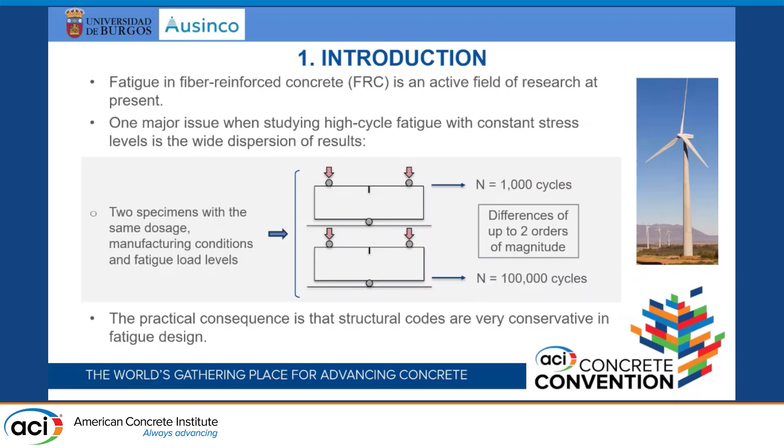Our research has been focused on flexural fatigue and a particular result we obtained, which is the fatigue creep curves, relating the number of cycles versus the maximum CMOD. We are talking about flexural fatigue in notched specimens. This curve correlates the maximum CMOD in each cycle against the number of cycles.

With these curves, we want to achieve two main goals: explore the damage mechanisms that appear in fiber-reinforced concrete and how they evolve, and look for damage parameters in these curves that can let us predict the fatigue life of the specimens, thus reducing the scatter when predicting fatigue life.

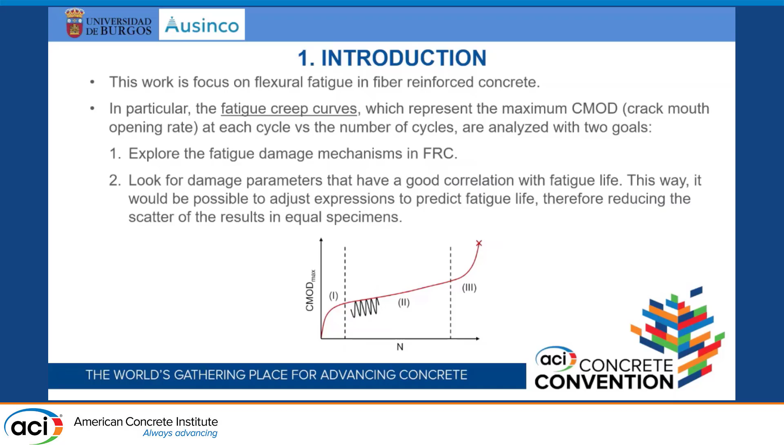So we manufactured 3 series of FRC, all with the same dosage except for the amount of fibers—this is the same for all series A1, A2, and A3. The only component that changes is the amount of fibers, from 0.3% in volume to 1%. We cast prismatic specimens of 75 by 75 by 300 millimeters with a notch of 1/6 of the depth, and cured them for 1 year in a climatic chamber.

Here you have one specimen already broken. Sorry for that.

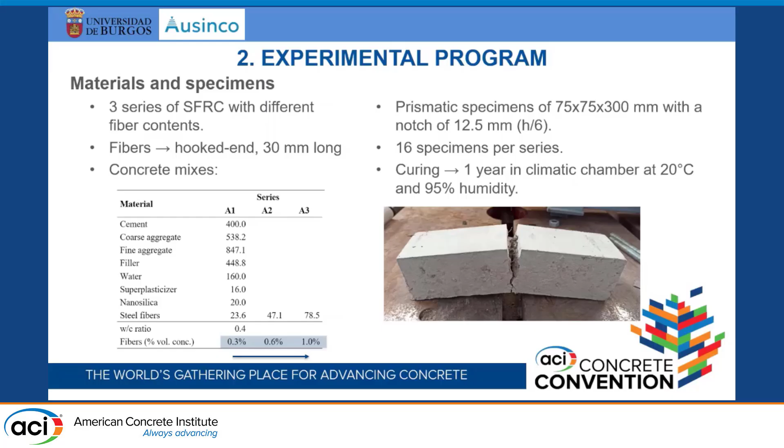Before the fatigue test, we characterized these 3 types of concrete, A1, A2, and A3. Perhaps the most relevant is the compressive strength of more than 100 megapascals after 1 year, and obviously the 3-point bending test to characterize the static flexural behavior. This is the stress corresponding to the limit of proportionality, roughly the first crack strength, and here the ultimate strength, the maximum equivalent stress the specimens reach throughout the tests. What you can see is that the ultimate stress is higher than f LOP in all cases.

This means that in all series we find a strain hardening behavior—once the specimen is cracked, the fibers are able to withstand more load than the matrix itself. That's important to keep in mind for later.

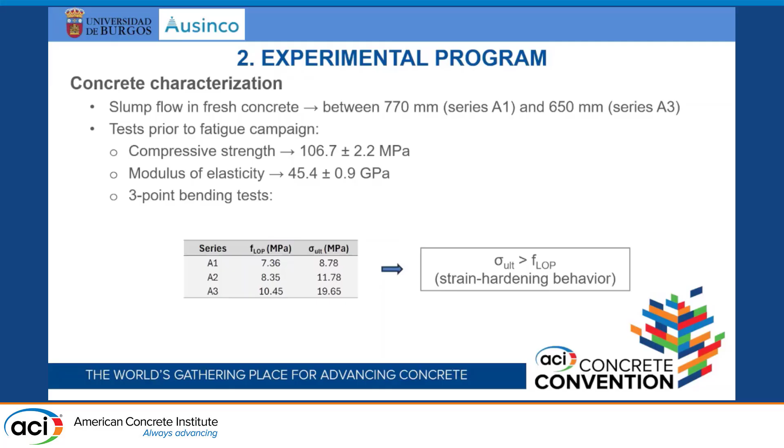Finally, we made the main tests, the flexural fatigue tests. Here's an example. These tests are made on notched specimens, also uncracked. We're a bit unusual in Burgos—we do the flexural fatigue test upside down, with the two supports over here, the notch around here, and the main support here.

One thing I have to mention is the load levels in the different series: they are between 16 and 80% of the average ultimate stress in each series. That means the load levels are different in each series, depending on the ultimate stress of each one.

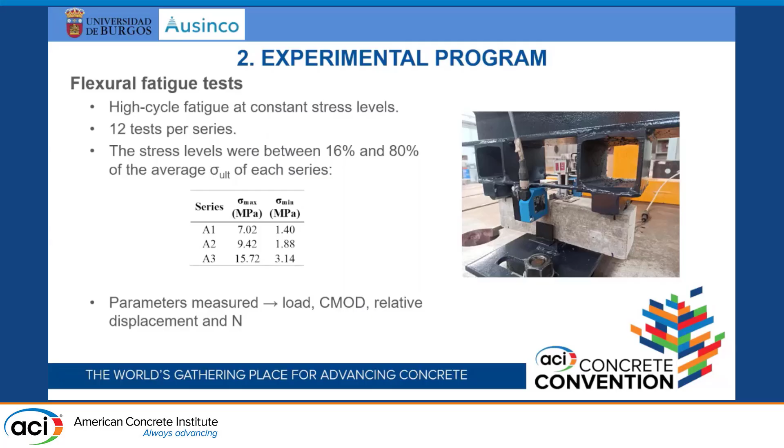And now we're moving on to the results. Just a reminder, this is the sketch of a typical cyclic or fatigue creep curve in flexural fatigue with three different stages, the second one being the most relevant and the longest, usually indicating how the fatigue damage is evolving through the specimen, through the notch, through the crack.

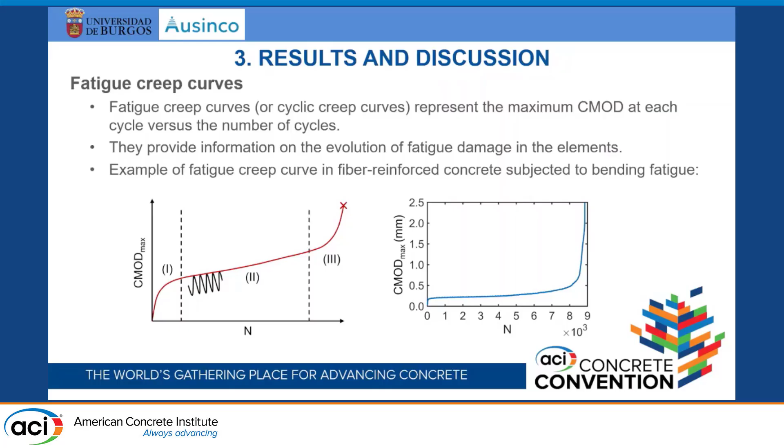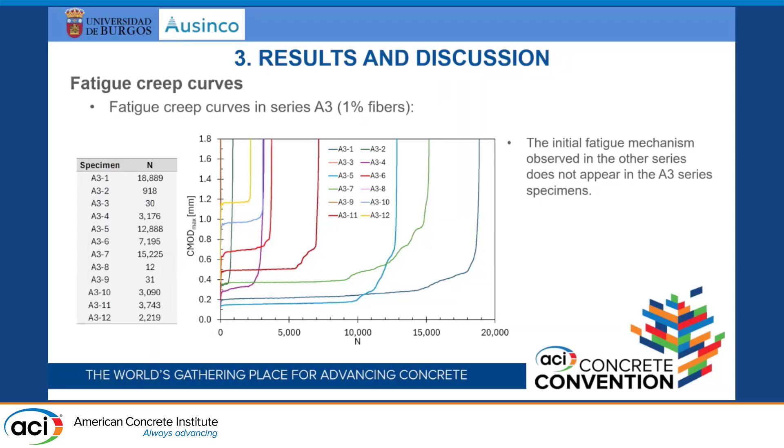So what we saw is that there is a general case of the fatigue creep curves in fiber reinforced concrete, and this is shown in A1 series. Here are the same fatigue creep curves, but showing the number of cycles in relative terms. This is better to understand and observe the two mechanisms, this one in dotted line and the other one in solid lines with different lengths and so on.

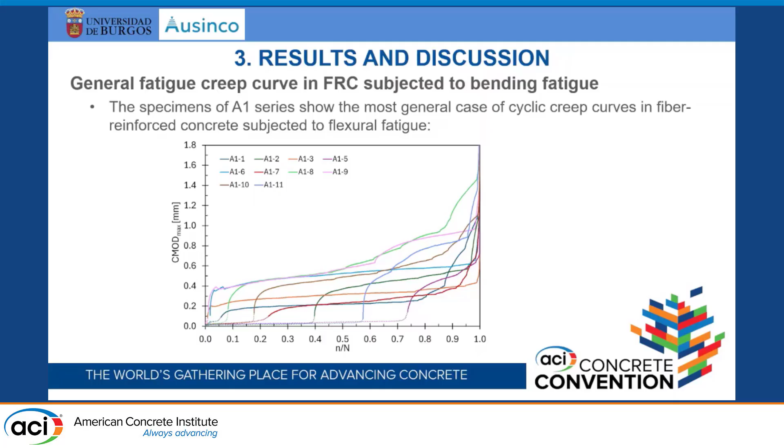So with this, with the example of this series, we can propose how is the general shape, the general behavior of fiber reinforced concrete under bending fatigue. And this is the shape, this is the double S-shaped fatigue creep curve that we are proposing, that we have actually observed.

First, we have a region of matrix fatigue. In this region, remember, uncracked concrete, what happens is that there are scattered microcracks along the notch, and fatigue loads are mainly resisted by the matrix itself. So the fibers, due to the low deformations, are not involved.

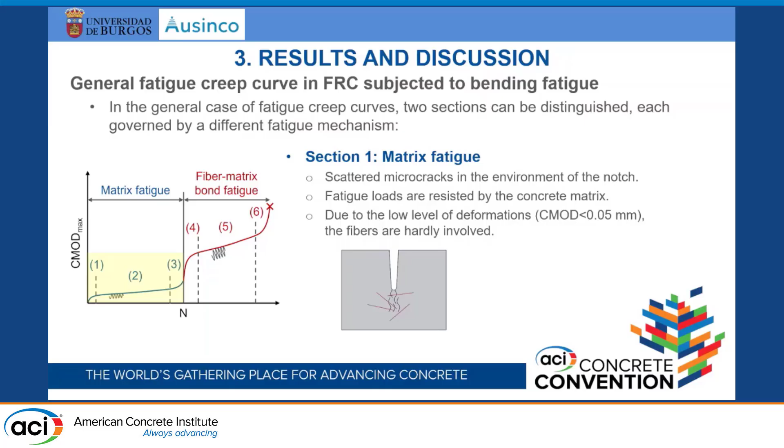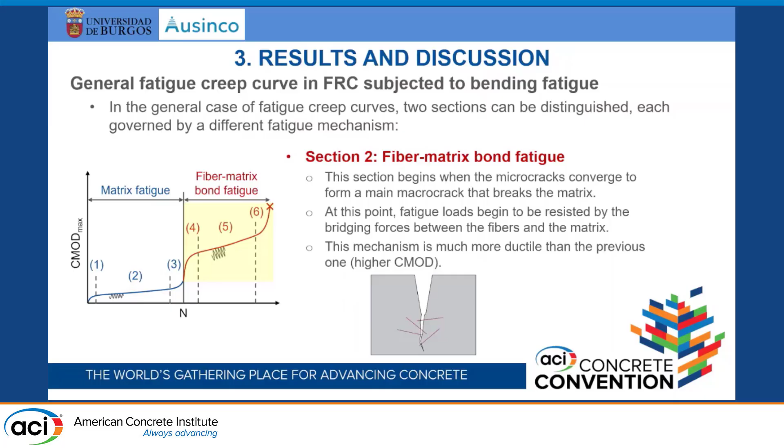What happens once we reach this point, which is more or less the crack point? What happens is that the fiber matrix bond fatigue starts. So all the microcracks converge in a main crack, and fibers start to actually work, and the adhesion between fibers and the matrix. So obviously this mechanism is much more ductile, and that's why we have more variation in CMOD. We go to more CMOD until the final failure of the specimen is reached.

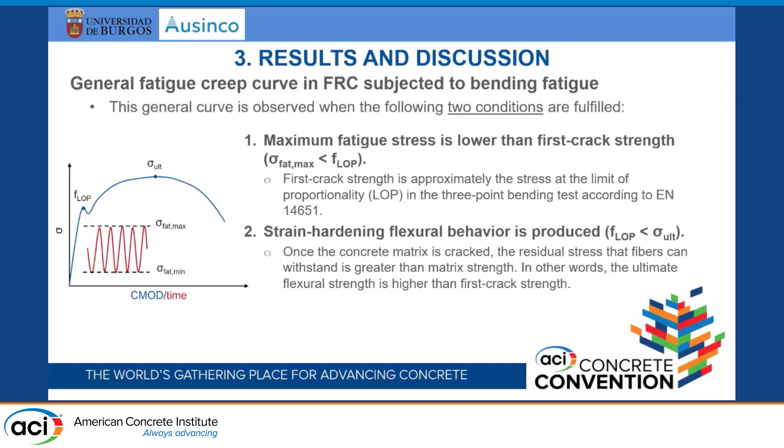So what are the conditions for having this double S curve? Well, two main conditions. First is that the maximum fatigue stress has to be lower than the first crack strength, that's one of the points. And the other condition is that it has to happen a strain hardening flexural behavior, or more precisely, the residual strength after cracking has to be higher than the maximum fatigue stress. So those are the two conditions for having this double S-shaped curve, the general case of the fatigue creep curves.

And what can happen in the other case? Imagine that the maximum fatigue stress is lower than the first crack strength, but higher than the residual strength. So what happens here? We only have matrix fatigue. Once the matrix cracks, the fibers can't withstand any more cycles, so we only see this first curve.

With this reflection and this proposal, we see that the number of cycles of a certain FRC specimen subjected to flexural fatigue can be divided into two parts: N1 regarding matrix fatigue and N2 regarding fiber matrix bond fatigue. Here we have, for all the specimens, the differentiation between the two fatigue lives. What we see is that only in A1 we have a certain amount of matrix fatigue, but matrix fatigue just disappears as we move on to A3.

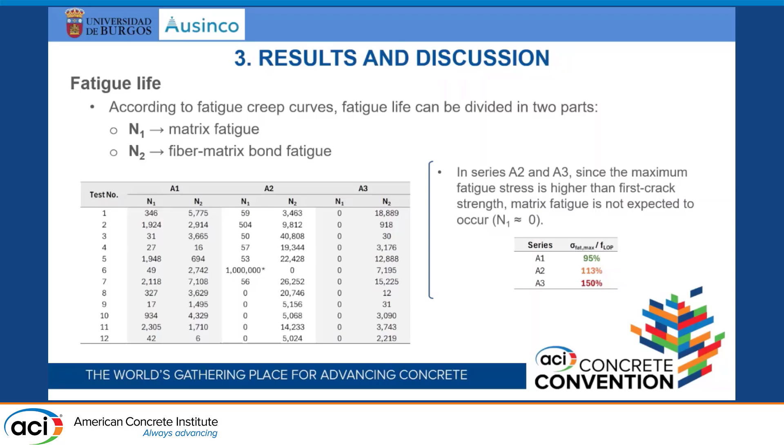Why? Because as we move on to A3, the maximum fatigue stress is clearly higher than the first crack strength. So what's happening in the A3 series is that during the first cycle the matrix cracks, and we only see the second part. That's what is happening in A3 and A2 as well.

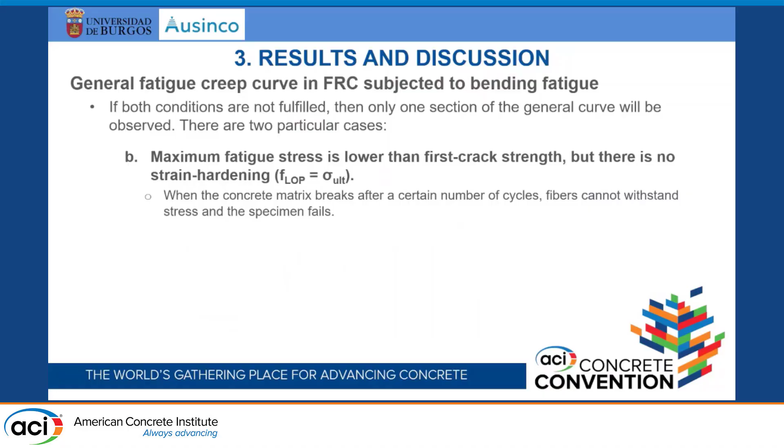So we only see fiber matrix bond fatigue. Apart from that, the second objective was to find, in the fatigue creep curves, parameters to predict fatigue life and try to understand what happened with fatigue life.

There is a very important parameter, which is the CMOD rate. The CMOD rate is the slope of the second part of the S curves. In the general case we have two CMOD rates: one corresponding to matrix fatigue and the other corresponding to fiber matrix bond fatigue.

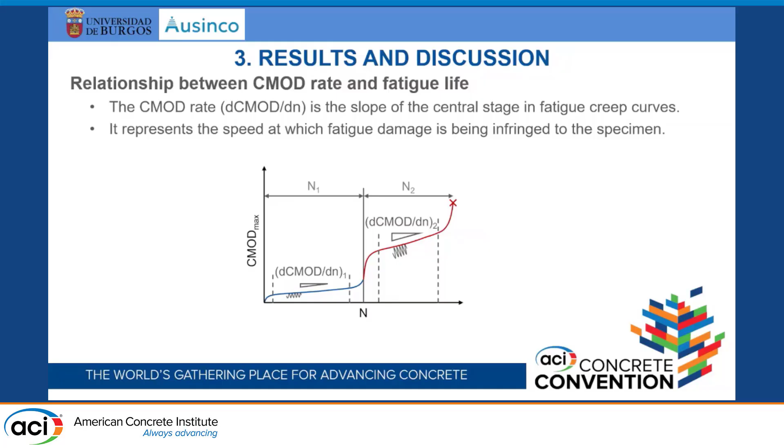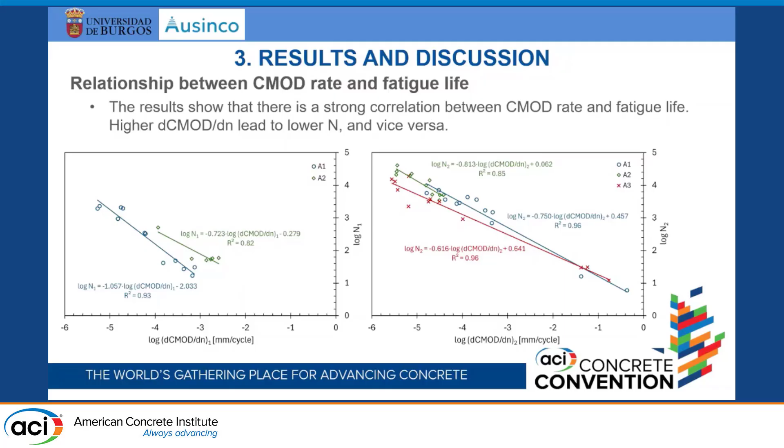So what is the implication of that? If we know the CMOD rate of the matrix fatigue, the first part, we can predict the fatigue life until cracking, just until cracking. And if we know the CMOD rate of the second part, we can predict the fatigue life from matrix cracking to the final failure of the specimens.

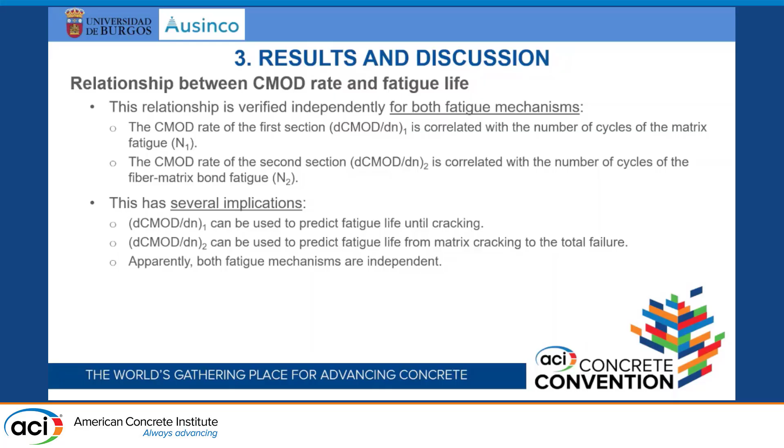So apparently these two mechanisms are independent, but each one has a CMOD rate that is able to predict or correlate really nicely with the number of cycles.

Finally, there is another parameter that can have a certain relationship with fatigue life, which is the CMOD increase between sections, between the two mechanisms. In A1, where we have this full general curve, we found a good correlation between the CMOD jump between the two mechanisms and the fatigue life.

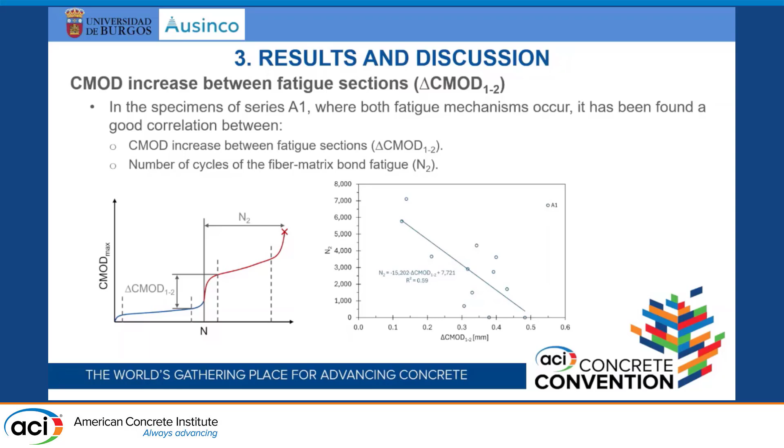So as this jump increases, the fatigue life becomes lower, with also a good correlation, though not as good as the one with the CMOD rate. So what does that indicate? What is the physical explanation for that?

Once the concrete matrix is cracked, there is a certain point at which the fiber matrix bond fatigue is stabilized. This value changes because it depends on the fiber distribution, so in some specimens the jump is lower, in others it is higher.

As this CMOD is higher, that means the real section supporting the specimen is lower, and therefore the fatigue life also becomes lower. So that could be the explanation.

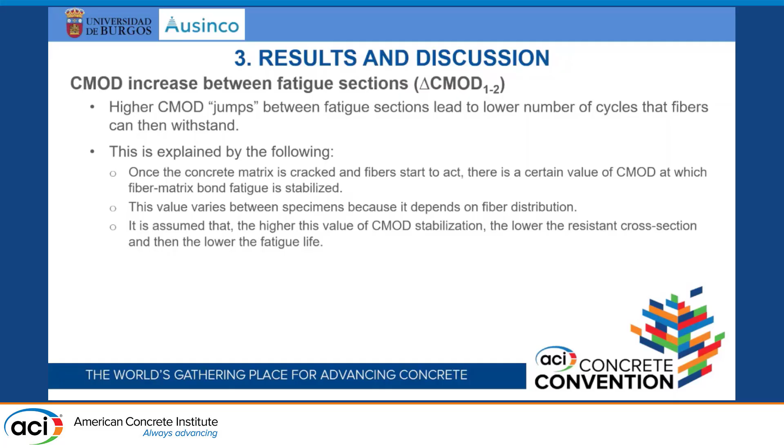And finally, a summary of the main results. The flexural fatigue behavior of FRC, in the most general case, consists of two mechanisms: matrix fatigue and fiber matrix bond fatigue. According to this, we have shown the general shape of this curve, establishing the conditions to observe this double curve, and also the particular cases that we can see.

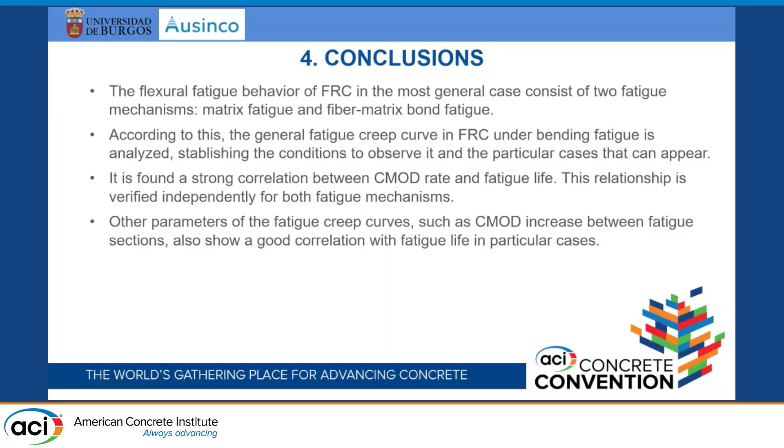On the other hand, it has been found that there is a really nice correlation between the CMOD rate and the fatigue life. This relationship seems to be independent between the two fatigue mechanisms that actually act. And finally, there are some other parameters of the fatigue creep curves that can enable us to predict fatigue life.